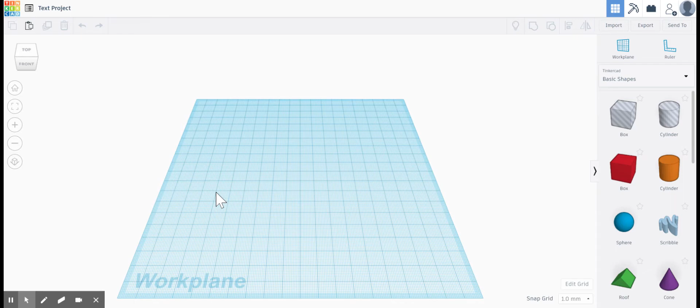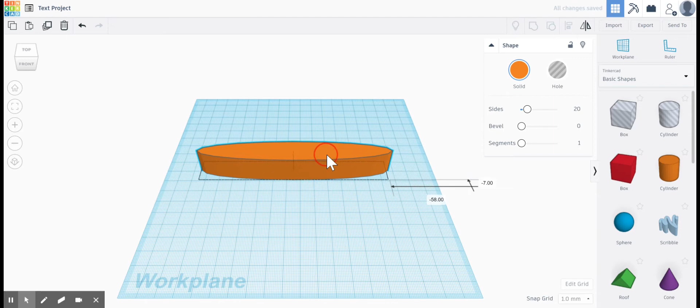So then the next thing is that the instructions tell you to drag over a cylinder onto your work plane and to size your cylinder to be 140 by 140 by 50. So your first measurement is 140 this way, and then 140 this way, and then 50 in height. Okay? Then it says to click on your shape and do Control C, Control V to paste the shape.

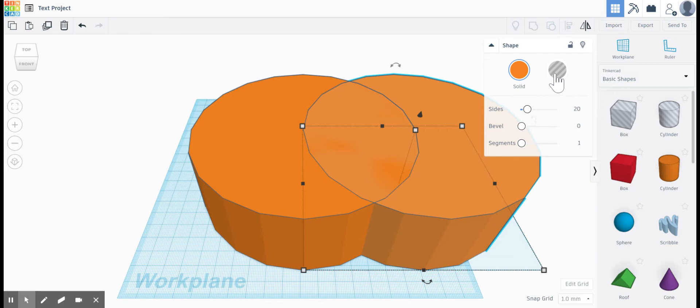Or not to paste the shape, but to copy the shape exactly the same size next to it. But you want to make this your hole in the middle of your bowl. So we're going to click on hole to change this over.

But before we can align this and group it together, we need to change the size so it's slightly smaller than our original cylinder shape. So we're going to change this one based on our directions. It says to be 130 millimeters by 130 millimeters on the bottom here, and then the height is 45. That way, we actually have a base to our bowl.

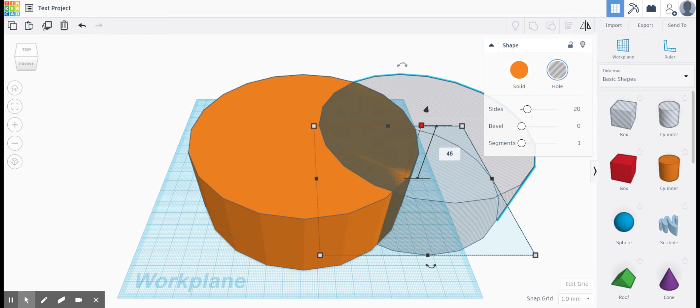But you'll see that if I just rotate this a little bit right now, this top part is still going to be solid. So when I go to align this and group it together, I need to make sure that I raise up this hole to the top so that when I group it, the solid part is on the bottom, which can contain the water or food or whatever else I'm making.

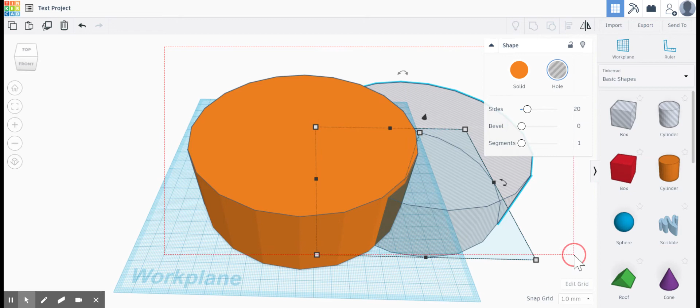So now the next step is to highlight both shapes and to click on the Align tool. I'm going to zoom out just a little so I can see all my dots. And I want to center it and then center it. But you can see that now it looks like it disappeared. That's because it's hiding underneath because it's aligned to the bottom.

But I want it aligned to the top. So I'm going to click on the top Align button. And now I can see that that shape is up on the top edge here. And now I'm going to group them together.

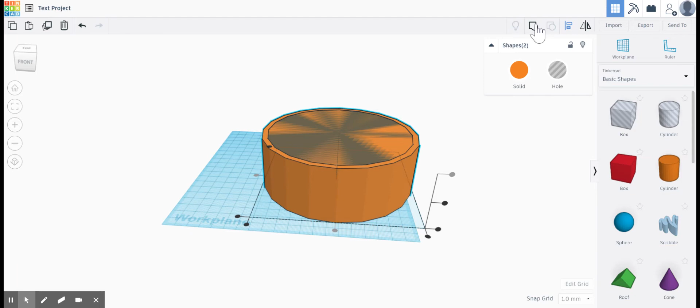So now that I have my bowl shape, the next step is to create the text. So to create the text, if you come over to the basic shapes on the side here, you see that there's actually a text option that you can just drag over.

And to change what the text says, you click over here in the box where it says text, and you change the word in this box. So I'm going to make it for my dog Belle, so I'm going to type in Belle.

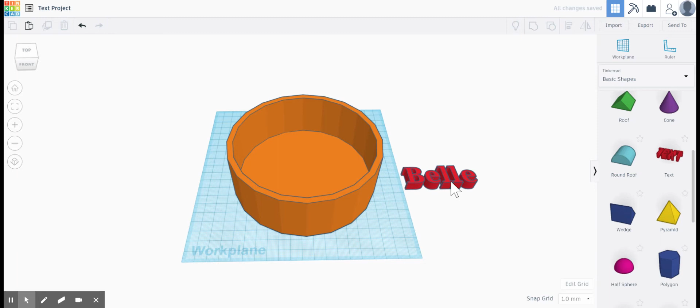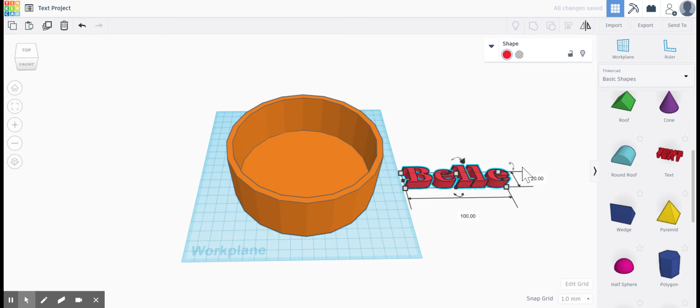Okay, now, once I have the text written, the instructions say to make your text 100 millimeters long, 20 millimeters wide, and 2.5 millimeters tall. So I'm going to click on the corner and resize my text to be 100 by 20, and the height 2.5.

Oops, try that again. There we go. Okay, so now I want to put the text right here on the top part of this inside section of my bowl.

So to do that, what I'm going to do is actually drag my work plane. So you notice right now, this says work plane on the bottom, and that's the surface on which you are working. But I want to work on the surface that's in here, which is slightly above my work plane.

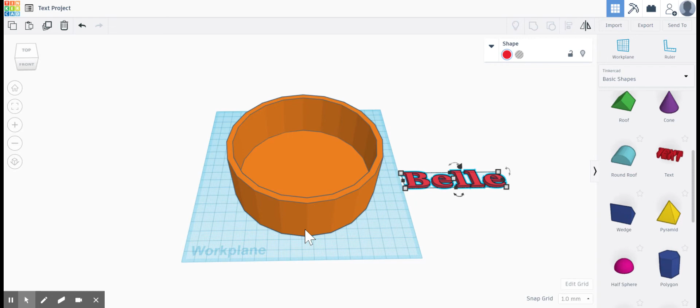So I'm going to change my work plane and bring it and drop it right on top of the inside of the bowl here. And now if I click on my shape to select it and press the letter D, it layers or changes where the word is layered on top.

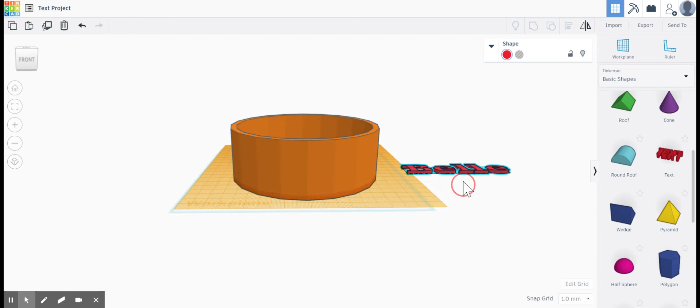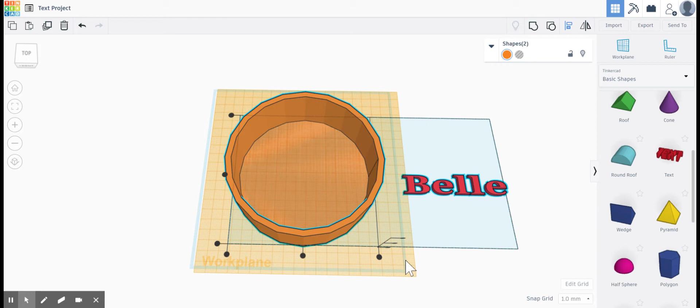So you can see now it's actually sitting on top of my work plane, which is just aligned with the inside of my bowl. So what I can do once I have that done is highlight both shapes, select my Align tool, and again, I don't want my bowl to move, I want my words to move into my bowl. So I'm going to actually click my bowl to make all my dots come around the bowl so that I know that it's going to move just the word, not my shape over here.

So I'm going to center it and then center it one more time. And now because it's on my work plane, it's sitting directly on top of my bowl here. So I don't need to change any of the height on my Align tool here.

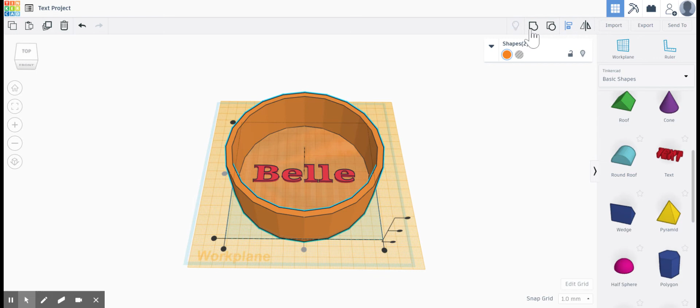Okay, so then the last thing I want to do is to group these two shapes together. I'm going to drop my work plane back down to the ground by clicking on it, dragging, and putting it down onto this surface. And you can see that because the two colors are the same, they're no longer red and orange anymore, that it is grouped together as one piece. And this is your embossed.

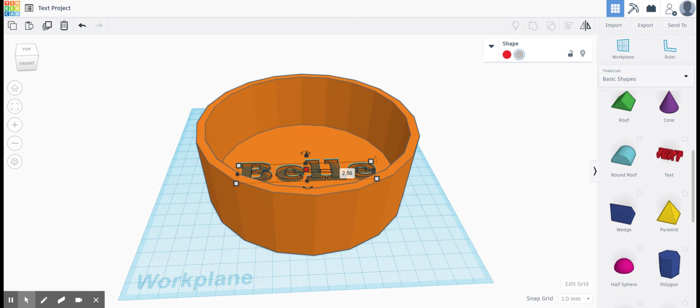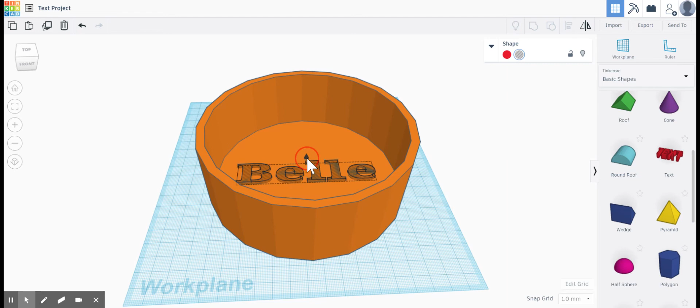So to drop this down 2.5, so it's exactly aligned with the top, what we do is we click on this little arrow that kind of looks like, well, it looked better when I had it zoomed out. It's kind of like a little cone upside down, like an ice cream cone. If you click on the little upside down ice cream cone and lower your word down to be lowered 2.5.

So you can see as I'm lowering it, it's going -1, -2, -3. It doesn't go -2.5. So if I let go at -2 and click on this box and type in, if it will let me, it doesn't seem to want to let me, -2.5, enter. Now you can see it's aligned with the top surface of our bowl.

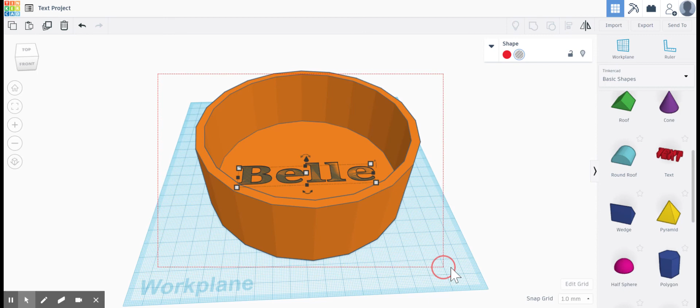So if we click on our two shapes here and group, now we have that internal section is cut out. So that is our engraved bowl. So you would take a screenshot of this and go over to your slideshow and put this in for engraved.

Okay, so those were the two easy ones. Now the next step is a little bit more tricky. In this step for inlay, where you have two different colors, you actually have to have two different parts that are separate but go together. So what you're going to do is you're actually going to take this bowl here and do Control C, Control V to create a copy of that bowl with the letters already out.

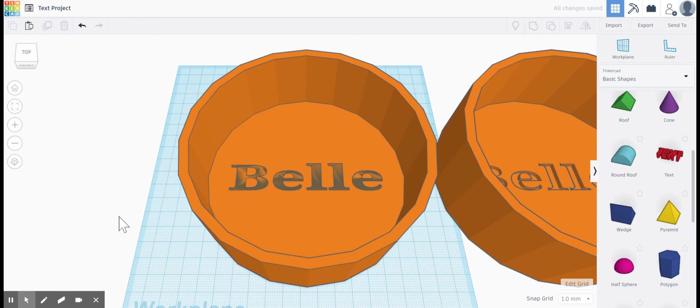Okay, then to create the letters that are going to go inside so that they would actually fit and match, you're going to click on the original bowl and ungroup it. Then you're going to click off of the whole thing, click just on the bowl, and hit delete so that all you're left with is the word still in the exact place it was originally. Then you're going to change the word back into a solid shape again.

Now it looks about right, except we need this word to fit into the space where our gap is for our word over here. Even though we're going to print it, or separate them into two separate files, they have to be in the exact same spot, so that when we go to print it, they print in the right places. So to do that, we're going to highlight those shapes and click Align. This time we do want the bowl and the word to be aligned.

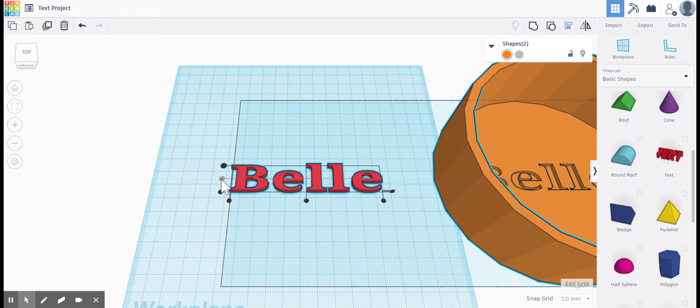So we're going to move the bowl back over to where our word is here. I'm going to click on the word, so you see it moves my align tool around that. It's already aligned in the middle on this side, but we need to align it in the middle on this side. So you can see that my word is fitting exactly into that shape that I already created.

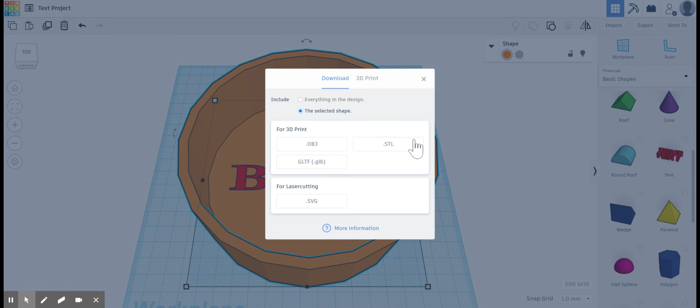I do not want to group it because then when I go to send it to my teacher to have it 3D printed, I have to actually send both files. So I would click on the bowl, click export, STL file, the selected shape, and then send this as one file to my teacher. The second file I would send would be, I click on the word, export, selected shape, STL, and then send this to my teacher as well.

So then when the teacher goes to print these two parts together to make it two colors, they actually have to download both files and use those together to create the two different colors to be able to print it all together.

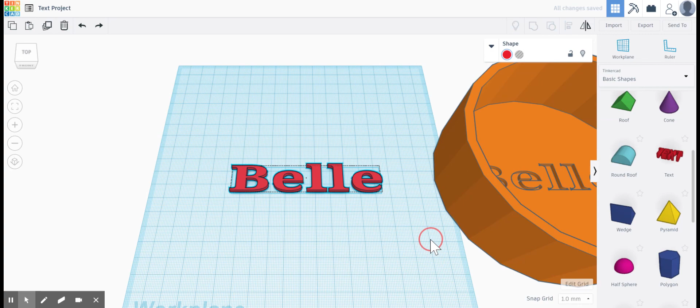So now that you have this, you want to take your screenshot of the whole thing together. You want to take your screenshot of just the bowl. So again, what I'm going to do to get just my bowl picture is I can click the undo button and click on my image here, and I can just screenshot it like this. So I have the image of my word separate, the image of my bowl separate with it engraved, and then my last picture is of them together like this. So on your final picture, you're going to have 3 different images to show how you put it together.